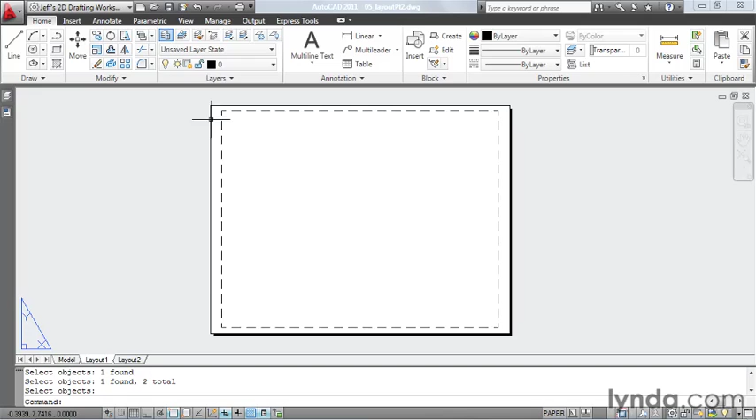I'll jump into the Chapter 15 folder inside our Exercise Files directory, select this title block drawing, and click Open.

Now that I have two drawings open in my interface, I'm going to click the View tab, and then come down and click the Tile Vertically button. This gives me a nice side-by-side view of my files.

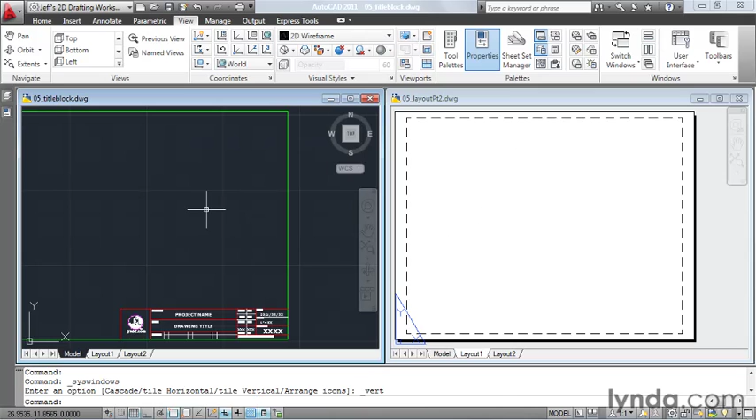Let's clean up these views a little. I'll start by zooming out and centering my title block geometry in this window. Then I'll click to put the focus in this window, and pan this over and center my layout.

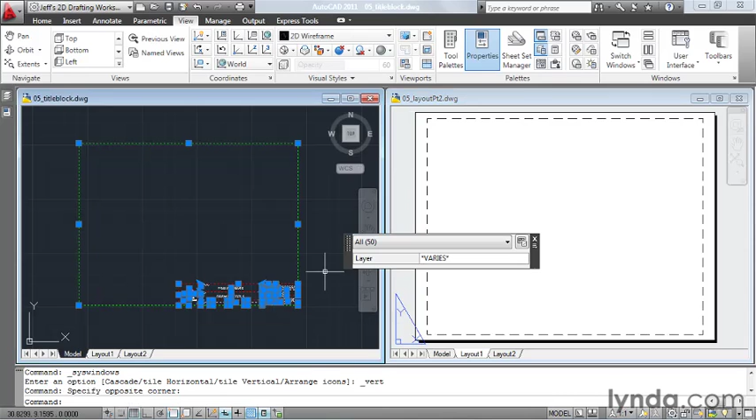To move this geometry onto my layout, I'm going to click to put the focus on the title block drawing, then select this geometry, click and hold on a highlighted portion of a line, and drag this into the other file.

Now I will visually center this as well as I can. I don't need my title block drawing anymore, so I'll close it and maximize the other drawing on screen. At this point, my title block looks like it's centered fairly well.

If necessary, I can always come back later and adjust its location after I make my first plot. Now that the title block's here, I can zoom in and edit the text to suit my needs.

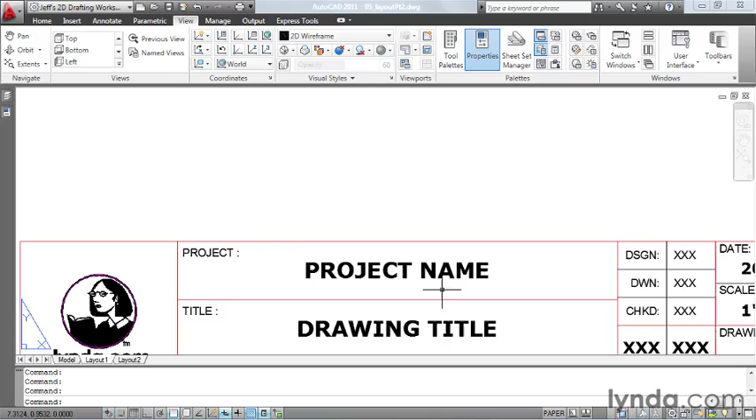The drawing that I'm printing is a headlamp mounting plate.

In addition to title blocks, layouts are also a great place to put notes, legends, north arrows, and scale bars. In our next lesson, we'll complete our layout by adding a viewport and setting our geometry to a measurable scale.